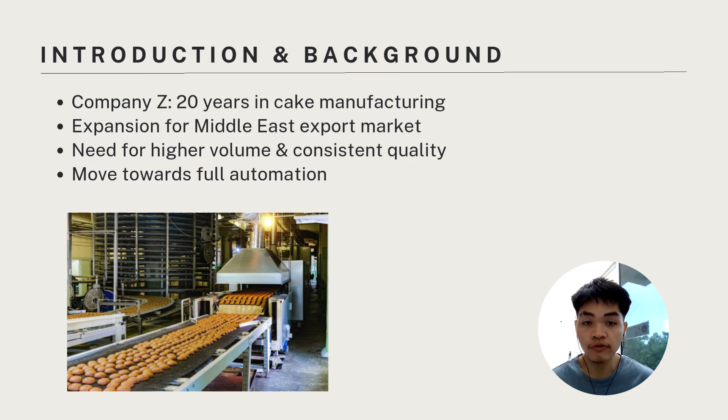Firstly, I will be talking about introduction and background. Company Z is a cake manufacturer that has been operating for about 20 years, mainly supplying local supermarkets and hypermarkets. Over time, competition in the food manufacturing industry has increased, and customers now expect consistent quality and reliable supply. Recently, Company Z received a major contract to export cakes to the Middle East. This contract requires large production volume and strict quality consistency, which is difficult to achieve using their current semi-manual production system. Because of this, Company Z is planning to build a new factory and adopt full automation. Automation will allow the company to increase capacity, improve efficiency, and ensure consistent cake quality suitable for international markets.

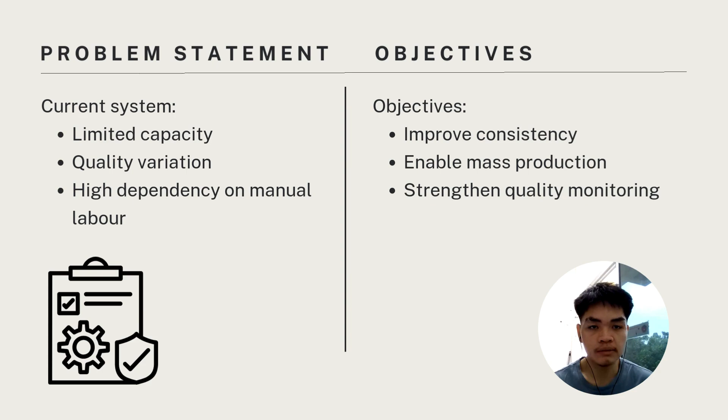Next, I'll be talking about problem statement and objectives. Firstly, what is the problem statement? The main problem faced by Company Z is that the existing production system cannot support mass production efficiently. Manual handling introduces variations in cake weight, texture, and appearance, which affects product consistency. In addition, the company has limited experience in automated mass cake production, making it difficult to meet export quality standards without a structured system. Therefore, the objectives of this proposal are to improve product consistency, enable large-scale automated production, and establish a reliable quality monitoring system that can meet international food safety and quality requirements.

Moving on to automation in food manufacturing, I will talk about the benefits and common uses in the bakery industry. In modern food manufacturing, automation is widely used to improve efficiency, hygiene, and consistency. Automated systems reduce direct human contact with food, which lowers contamination risk and improves food safety. In the bakery industry specifically, automation is applied in processes such as ingredient weighing, mixing, baking, cooling, and packaging. These systems ensure that production parameters such as temperature and time are controlled precisely. For a company like Company Z that is expanding into export markets, automation is essential to maintain consistent quality while increasing production volume.

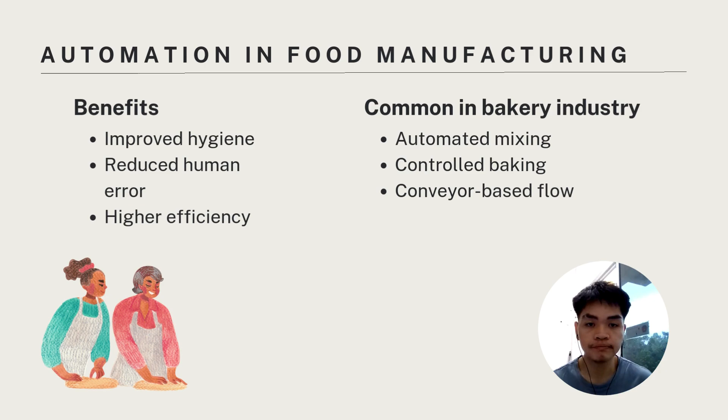Now, what is the importance of quality monitoring? Quality monitoring plays a critical role in automated food production. It ensures that every cake produced meets the required standards for appearance, texture, weight, and especially safety. Without proper monitoring, defects may only be detected at the final stage, leading to increased waste and higher costs. Early detection allows corrective actions to be taken immediately. For export products, quality monitoring is also important for compliance with international regulations and for maintaining customer trust in overseas markets.

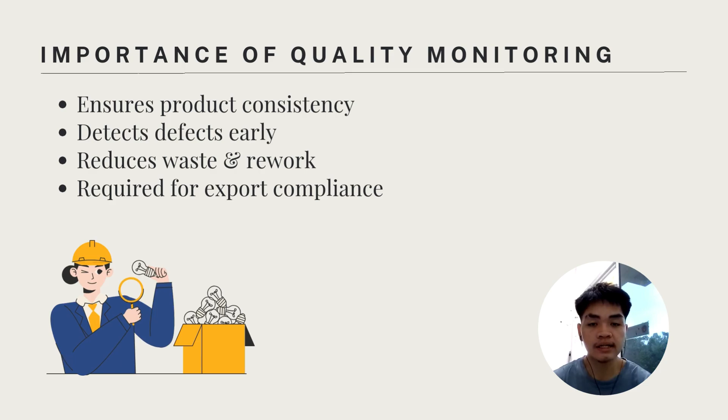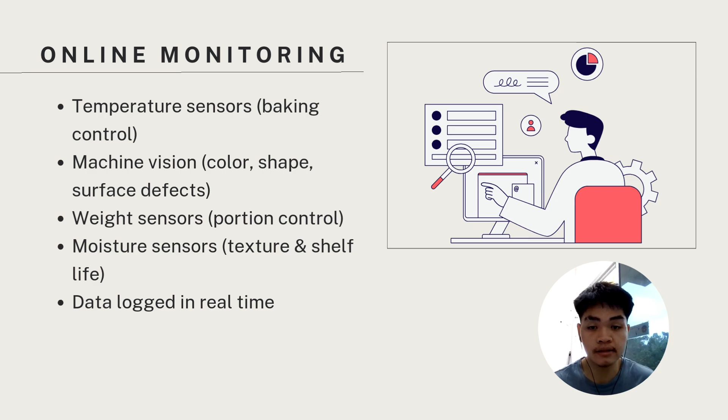Let's talk about online monitoring. What is online monitoring? Online monitoring refers to real-time inspection carried out during the production process using sensors and automated systems. Temperature sensors are installed in baking ovens to ensure uniform baking and prevent underbaking or overbaking. Machine vision systems use cameras to inspect cake color, shape, and surface condition, allowing defective products to be identified instantly. Weight sensors are also used to ensure that each cake meets the specified weight, while moisture sensors help maintain the desired texture and shelf life. All monitoring data is collected and stored in a centralized system, enabling immediate response to any deviation from set standards.

Now let's take a look at offline monitoring, which is also laboratory testing. Offline monitoring complements real-time monitoring by providing detailed analysis through laboratory testing. Samples are taken from each production batch based on a predefined sampling plan. Physical tests are conducted to evaluate cake texture, color, and size, while chemical tests verify moisture and ingredient consistency. Microbiological testing ensures the cakes are safe for consumption, which is especially important for export products with longer shelf life. Packaging integrity tests are also performed to ensure that seals are secure and labels are accurate, protecting the product during transportation.

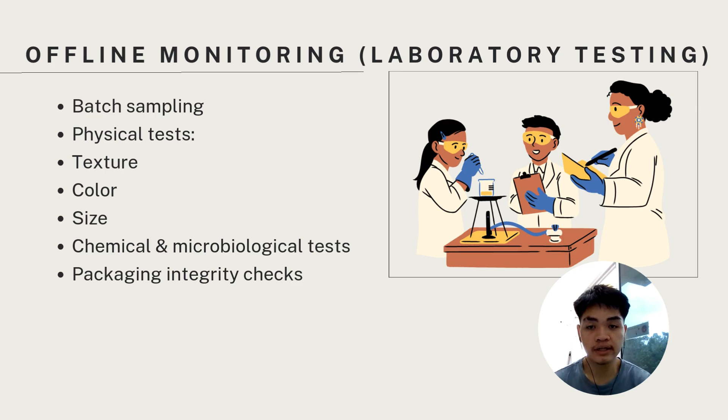Now, what are the benefits of the proposed monitoring system? The proposed monitoring system offers several benefits to Company Z. Firstly, it ensures consistent cake quality by controlling key parameters throughout the production process. Early defect detection reduces waste and rework, leading to lower production cost. Data recording also provides full traceability, which is essential for audits and customer assurance.

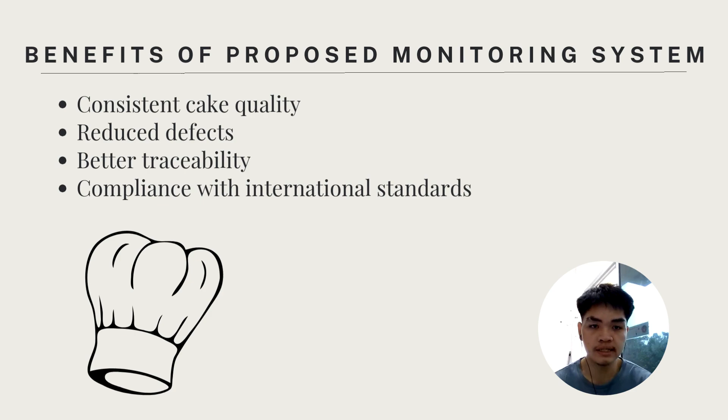Overall, this monitoring system strengthens Company Z's ability to meet international standards and successfully expand into the export market.

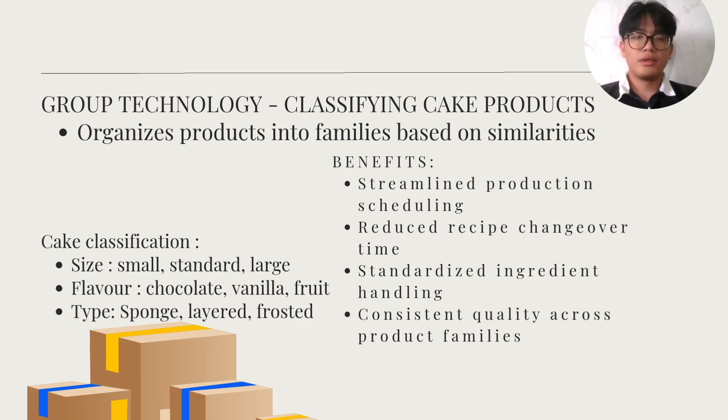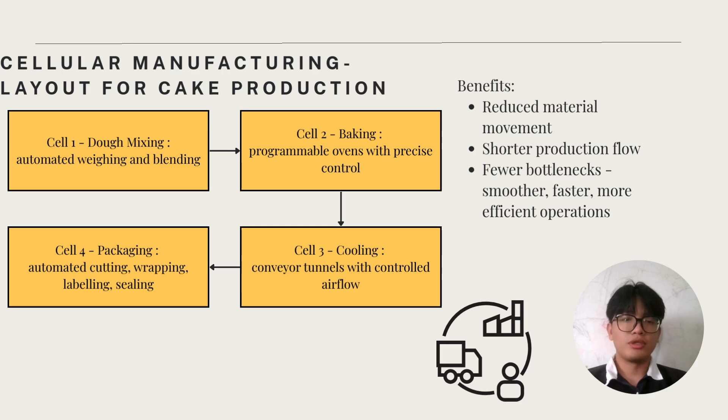The benefits of this cellular system are that it reduces material movement, shortens the production flow, and produces fewer bottlenecks, resulting in smoother, faster, and more efficient operations.

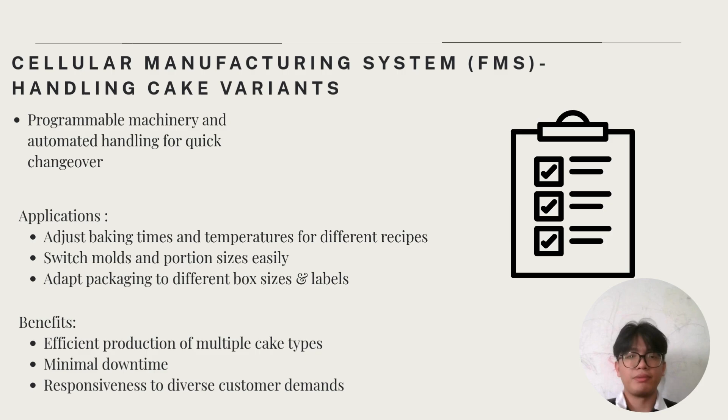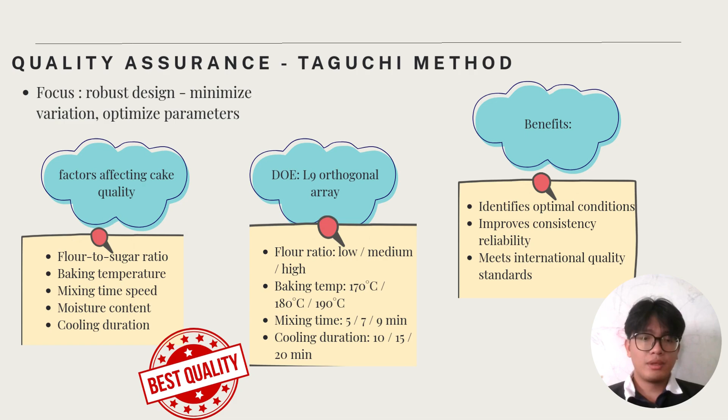The benefits of this approach are that it can identify the optimal conditions, improve consistency and reliability, and meet international quality standards for the cakes.

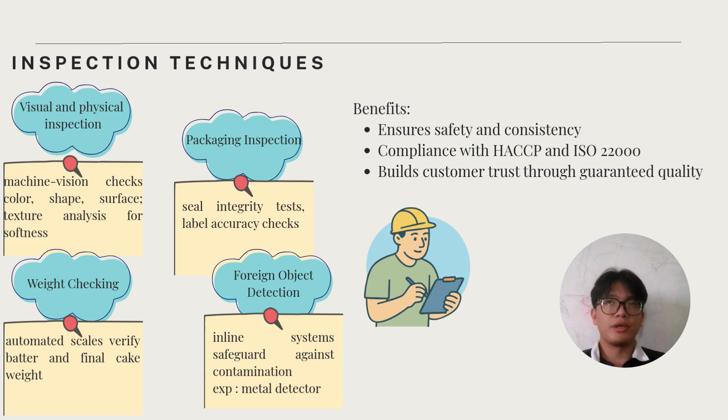So the benefits of these inspection techniques: it ensures safety and consistency, which is very important for the consumers. It is in compliance with HACCP and ISO 22000. Lastly, it builds customer trust through guaranteed quality, which is important for the economic viability of a company.

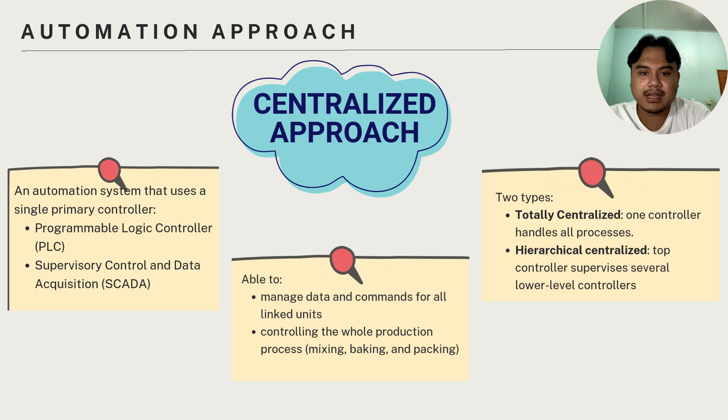Moving on again to the automation approach, consisting of centralized and decentralized approaches. The centralized approach uses a single primary controller, which may include a PLC or SCADA system, and is able to manage data and commands for all linked units, controlling the whole production process such as mixing, baking, and packing. It consists of two types: totally centralized, where one controller handles all processes, and hierarchical centralized, where a top controller supervises several lower level controllers.

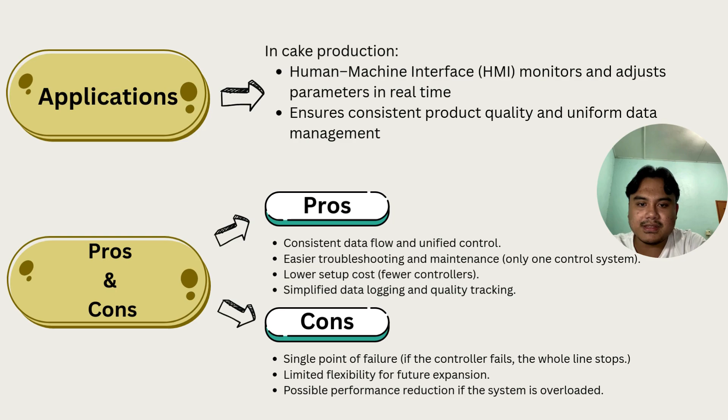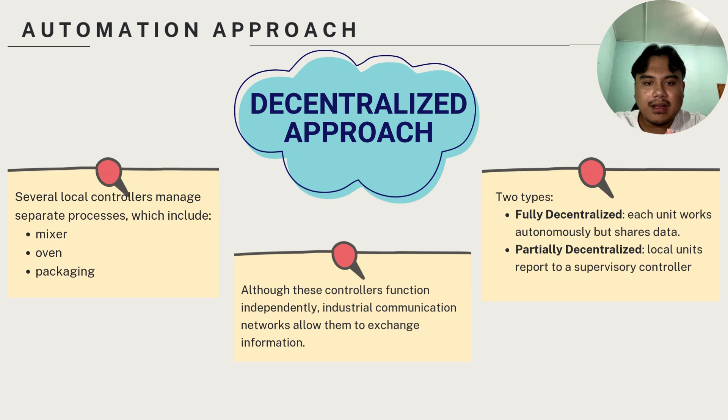For the fully decentralized, each unit works autonomously but shares data. For the second type, which is partially decentralized, local units report to a supervisory controller.

Similar to the centralized approach, the decentralized approach also has its advantages and its own flaws. For the advantages, it consists of greater flexibility and scalability, in which it is easy to add new production modules. The second advantage is fault tolerance. To explain, failure in one area does not stop the entire production. For the disadvantages, the first is higher complexity in production coordination and troubleshooting.

It may require multiple PLCs and communication links, which may influence higher cost. The third disadvantage is consistency in quality. It's much harder to maintain without advanced synchronization.

Now is the recommendation part. Companies must choose to apply either the centralized approach or the decentralized approach.

So after taking some considerations, companies must choose an approach, which is the centralized system approach, due to a few factors. One of the factors is that it is much simpler and easier for a small company like Company Z to enter full automation.

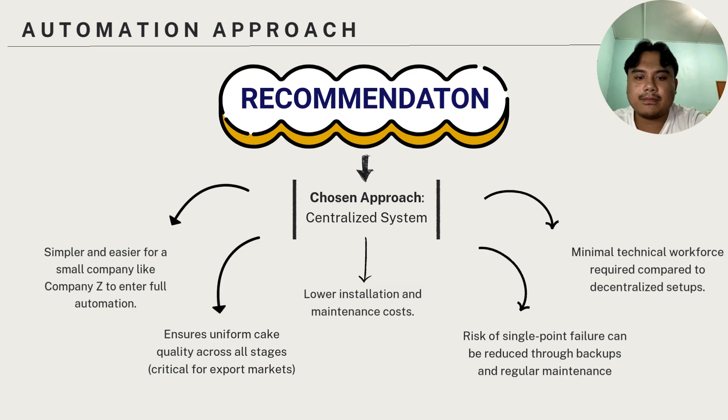That settles the previous part. Now we're moving on to the next chapter, which is costing. Under this chapter, it consists of a few elements, one of them being equipment cost, installation and training costs, and many more. So the first one is the equipment cost.

Under this equipment cost, it consists of the estimated cost of a few machinery and sensor items, such as automated mixer and ingredient weigher, with an estimated price of 60,000 ringgit, conveyor systems estimated at 50,000 ringgit, a programmable baking oven estimated at 90,000 ringgit, weight and moisture sensor estimated at 10,000 ringgit, and many more. So to total up, the total price for the equipment cost is estimated to be

447,000 ringgit. The second part is the installation and training cost. For the installation costs, it involves mechanical setup, electrical wiring, control system integration, and testing.

For the mechanical installation and alignment, it is estimated to be 25,000 ringgit. For the electrical wiring and control panel, it is estimated to be 15,000 ringgit. For the PLC programming and software integration, it is estimated to be 20,000 ringgit. And lastly, for the installation cost, the system commissioning and testing is estimated to be 10,000 ringgit, with a total price of 70,000 ringgit.

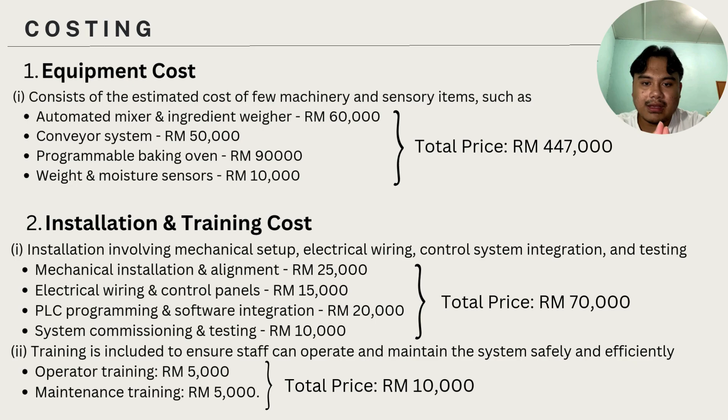Next is the training cost, which is needed due to the fact that it ensures staff can operate and maintain the system safely and efficiently. Under the training cost, it consists of operator training, approximately 5,000 ringgit, and also maintenance training, also 5,000 ringgit. The total price is 10,000 ringgit for the training cost.

The next costing involved is the maintenance cost, which is measured annually. This maintenance cost consists of preventive maintenance and consumables. Preventive maintenance includes sensor checks, calibration, and motor inspection, with an estimated annual cost of 12,000 ringgit. For spare parts, it includes the PLC module, belt, and sensors, with an estimated annual cost of 8,000 ringgit.

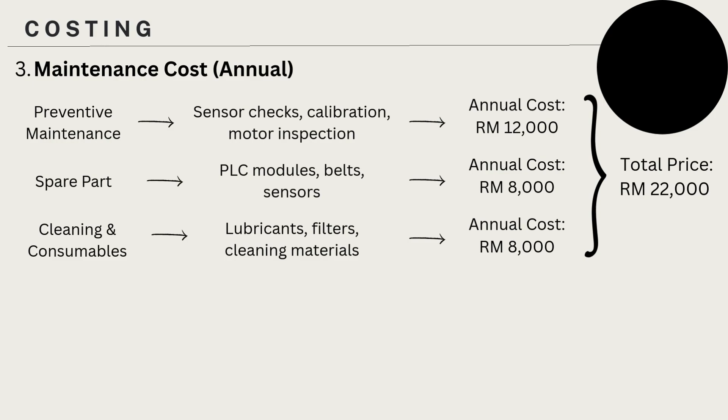For cleaning and consumables, it includes lubricant, filter, and cleaning materials, with an estimated annual cost of 8,000 ringgit. So for the total estimated maintenance cost, the annual maintenance cost is estimated to be 22,000 ringgit.

The next part under costing is the operational cost change, which includes the labor cost. Under labor cost, we evaluate and analyze the labor cost before full automation is introduced, and also the labor cost after full automation is introduced. Before that, we make assumptions for the before-full-automation scenario.

The assumption for before full automation is that the workers in production will be working a single shift, 12 hours per day, and will be paid 6 ringgit and 50 cents per hour, in accordance with the government's mandated minimum wage, which gives a minimum monthly wage of 1,700 ringgit.

To explain further, before full automation is introduced, it consists of 8 production workers, 2 supervisors, and 2 quality inspectors. The total monthly labor cost is estimated to be 31,200 ringgit, and the annual labor cost is...

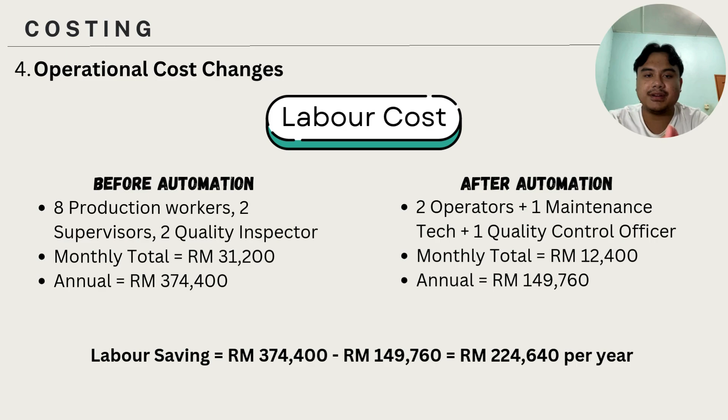The second part of operational cost change is utility and waste. Before we start, we make assumptions for company Z, which is located somewhere in Peninsula Malaysia. Due to that, the electricity usage by company Z is charged by Tenaga Nasional Berhad.

According to Tenaga Nasional Berhad's newest tariff, the electrical usage rate is 0.454 ringgit per kilowatt hour. The estimated electrical usage cost is 330 kilowatt hours per day, which equates to 53,935 ringgit per year. Waste reduction is deducted up to 15,000 ringgit per year, and reject reduction is deducted up to 10,000 ringgit per year.

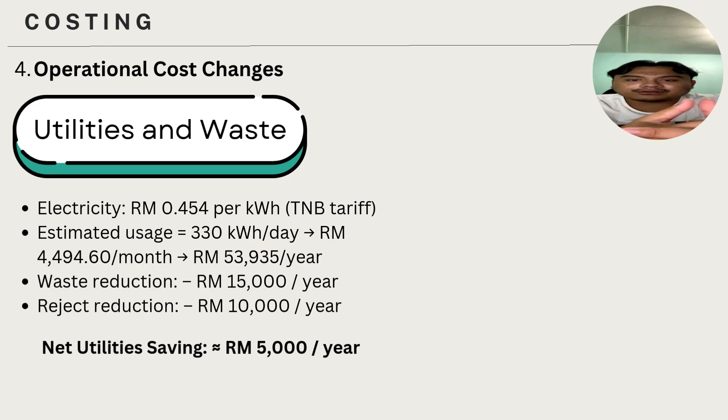Therefore, the net utility saving is equivalent to 5,000 ringgit per year.

Finally, the last part of the costing is the cost and benefit analysis. Under this part, we evaluate a few things: the total investment and the net annual savings.

For the total investment, the company has invested as much as 527,000 ringgit for the completion or startup of the new business with full automation.

Secondly, we take a look at the net annual benefits. The net annual benefit is basically the sum of the labor cost saving and the net utility saving, minus the maintenance cost. The net annual benefit is calculated to be 207,640 ringgit per year.

Lastly, we take a look at the payback period. To begin, payback period is the amount of time needed for an investment to produce enough saving or return to cover its initial cost.

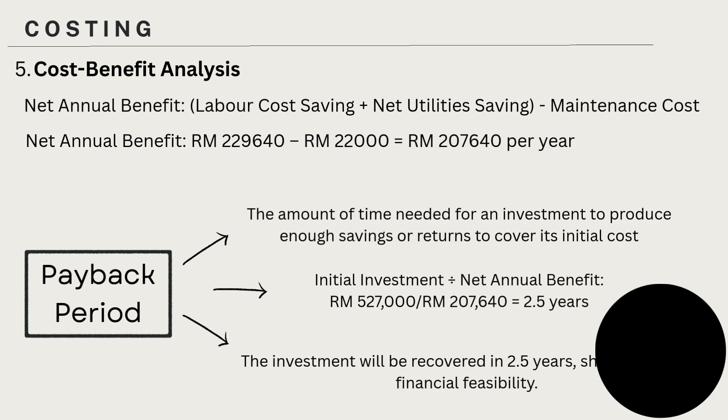The payback period is calculated by dividing the initial investment by the net annual benefits. For our scenario, the payback period is set to be 2.5 years. According to the payback period, this tells us that the investment will be recovered in 2.5 years, showing strong financial feasibility.